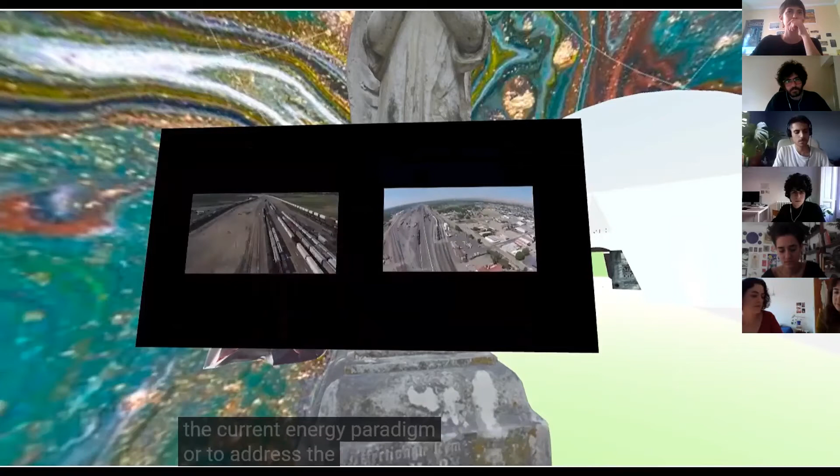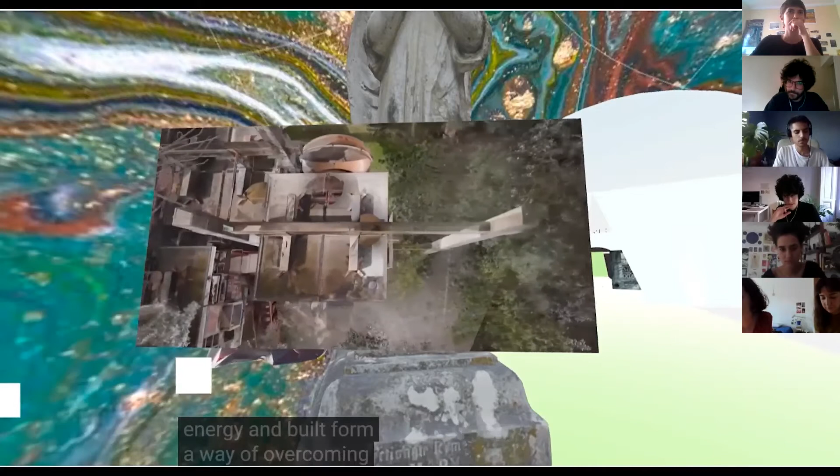These dynamics have given form to new architectural typologies and urban growth patterns that sustain energy-intensive ways of life. As long as its core is constructed by carbon form, the built environment as we know it will be fundamentally unable to supplant the current energy paradigm or address the climate crisis. As a result, we must reconsider the link between architecture and climate by exploring the reciprocity between energy and built form. A way of overcoming this cultural and architectural legacy is by recognizing the spatial expression of carbon energy in order to establish a process of architectural degrowth.

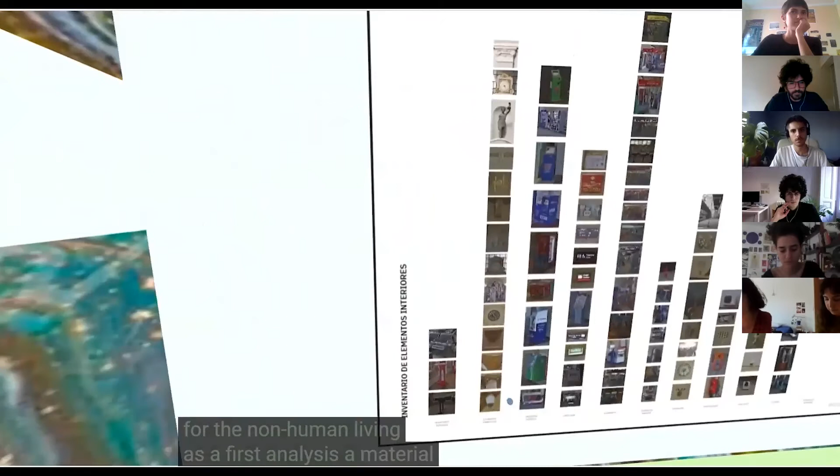We propose a series of interventions, protocols, that induce and accelerate the decay state of the station, understanding ruins as a catalyst space for the non-human living. As a first analysis, a material catalog is developed, locating and analyzing each of the station's construction materials, as well as extrinsic and non-human strategies of degradation. The anticipatory ruination of such spaces comes from an artificial intelligence that unchains a series of protocols of degrowth through data collection of the station's state—an Internet of Plants. Overcoming the nature-technology dichotomy, the tentacular algorithm functions as an autonomous system inside the station, establishing alliances between the human and non-human. A practical experimentation is built as a simulation of one of these network's nodes.

We propose an open-ended collection of 9 protocols following the same structure. They originate from an early required human intervention and develop as autonomous processes in synergy with the AI.

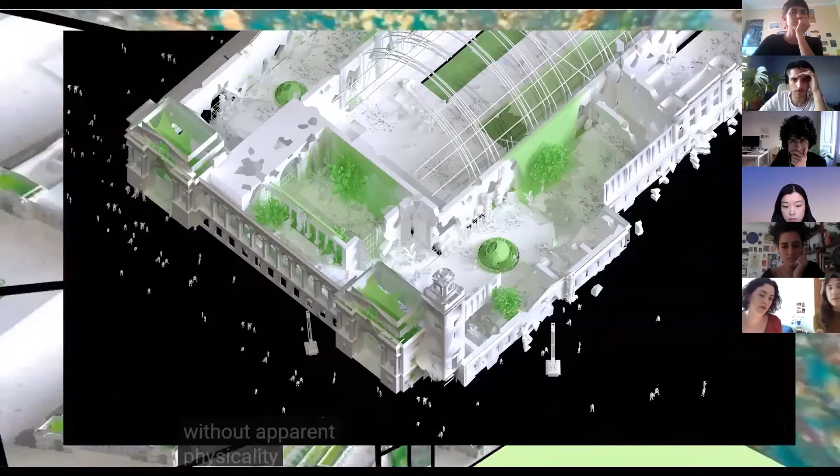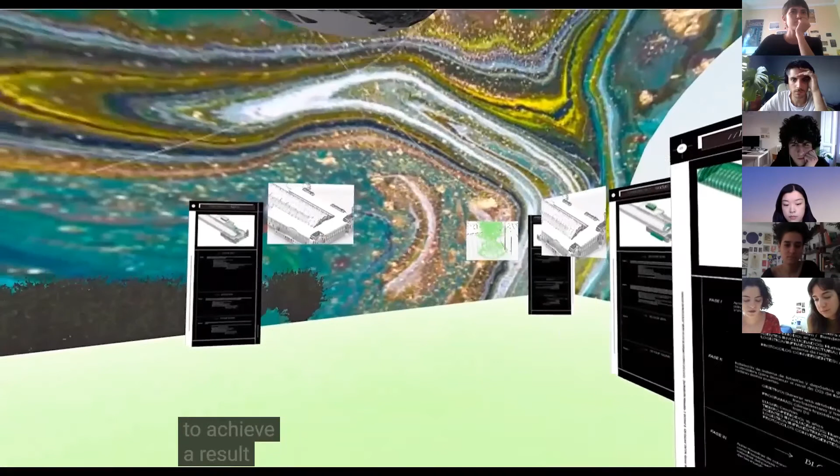We understand protocols as mechanisms without apparent physicality that have the ability to transform space without defining the final result, but only the necessary steps to reach it, enabling, ordering, and prescribing certain actions to achieve a result that, although it has been planned, leaves room for the unforeseen, the contingent, and its conscious manipulation during the process.

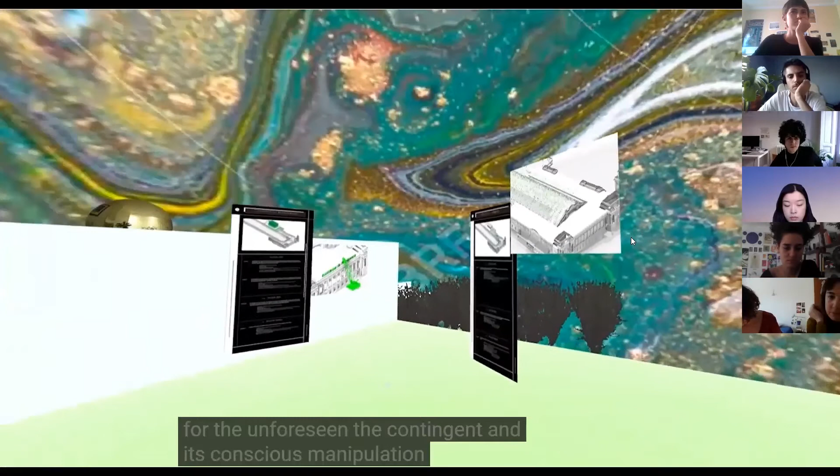The programmed decay of the station is organized along a timeline that encompasses the atmospheres required by each protocol, as well as non-human comfort, therefore redefining human comfort. At the same time, those constructed atmospheres determine an array of possible programs that can take place in the station in different phases.

Ruins are not failed buildings, but ecologies that offer reproductive and creative opportunities, spaces of in-betweenness. As such, it's a transgressive space that is no longer obliged to reproduce the normative system of the meticulously planned out city.

Through the incorporation of animal, plants, insects, microorganisms, and data, the anticipatory ruination, rather than forcing a process of de-anthropization, unchains a picture of degrowth in the consumption of resources.

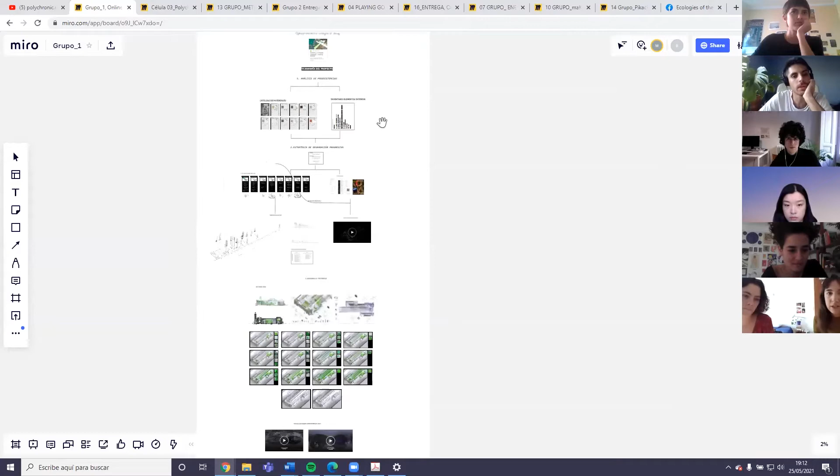In the midst of a... Do you want to show anything from the Miro, or we can just stop sharing screen?

Maybe zoom into the 10 or 12 images that are there that explain the protocols, or the general images, to show an overview of what the evolution could be like by decades.

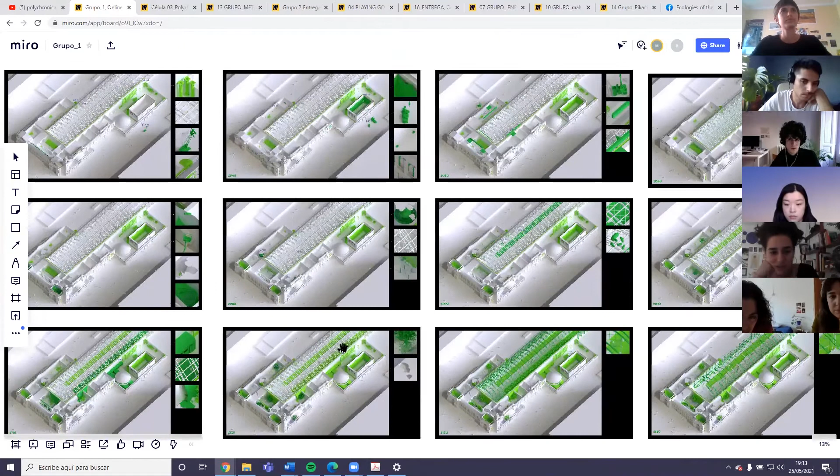These are images that show when these protocols are activated, and zoom into the small parts that take place. And these show the evolution of the protocols by decades.

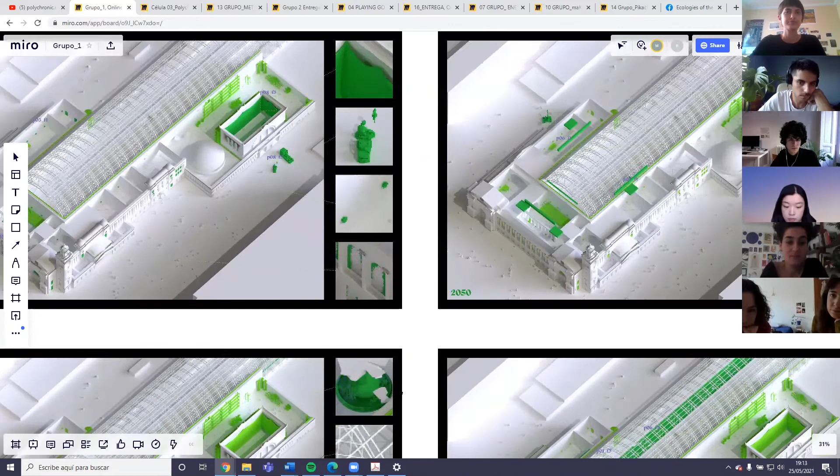It's kind of complex and the project has many layers, so maybe we can wait for the questions of the jury and then answer anything that has been left unclear.

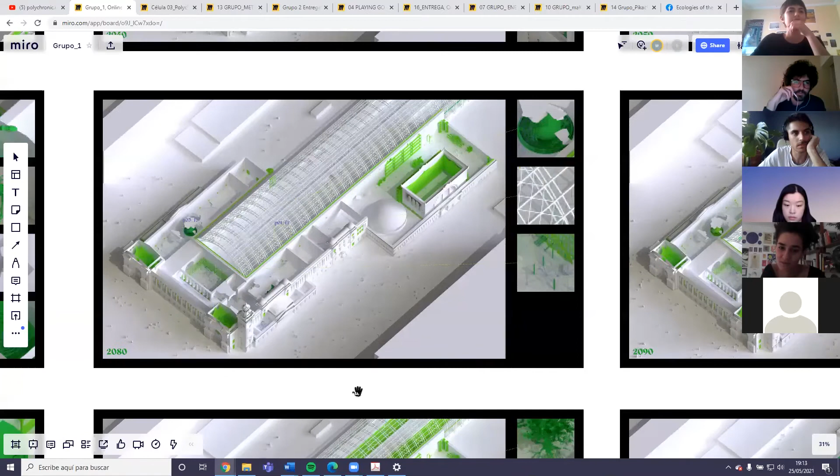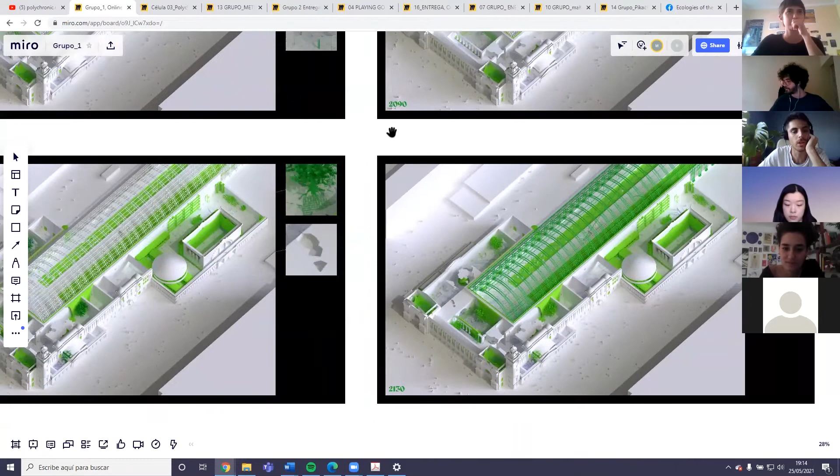I don't know if Regina or Berta, you want to add anything? Also guys, feel free to post the Miro link into the chat, so some of the clients can navigate through it while you explain it, or while they comment, or while we showcase the video. So not only for this group, but also for the next group, remember to post the Miro link. Perfect, thanks. Okay, so do you want to add something, Berta, Reggie, or Marta? No, I think it's okay. Okay.

Your turn, Navi. Hi guys, thank you for the presentation.

It was very nice, and I made some notes, and I have three comments. The first one, maybe I didn't catch the connection between the highlighted topic of the existing architecture, which is driven by the carbon economy, doesn't address the issues related to climate change. So this was the topic, and this was the statement of the initial part of the presentation.

And then you go into your concept, and there isn't a super clear connection on how your proposal is addressing these issues. In the first part you describe the different kinds of protocols, but it's something that happens with a single building, and you don't know what happens around this building. So this system seems designated to deconstruct this building, but where do people live and how does society work in this case?

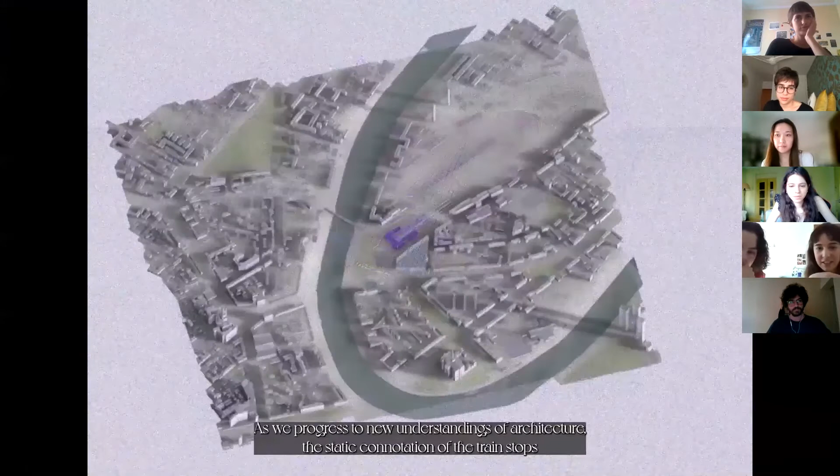In the midst of a search for a carbon-free form, all the preconceived systems are to be re-evaluated. Our concern today is the one regarding transport. As we progress to new understandings of architecture, the static connotation of the train stop is to be replaced with redefinitions in regards to resources, movements in space, time schedules, and density correlations. Station is no more stationary.

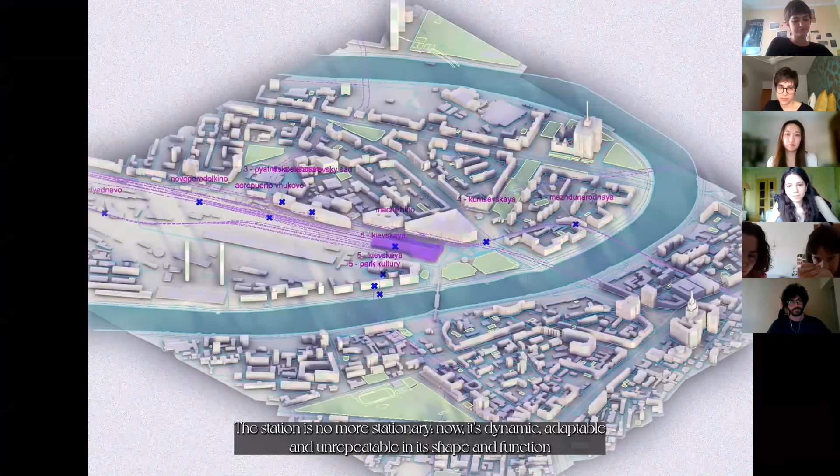It is dynamic, adaptable, and unrepeatable in its shape and function, for it is in constant evolution and form finding. The spatial behaviors of the inhabitants draw multiple possibilities, and these are all taken in by the architecture.

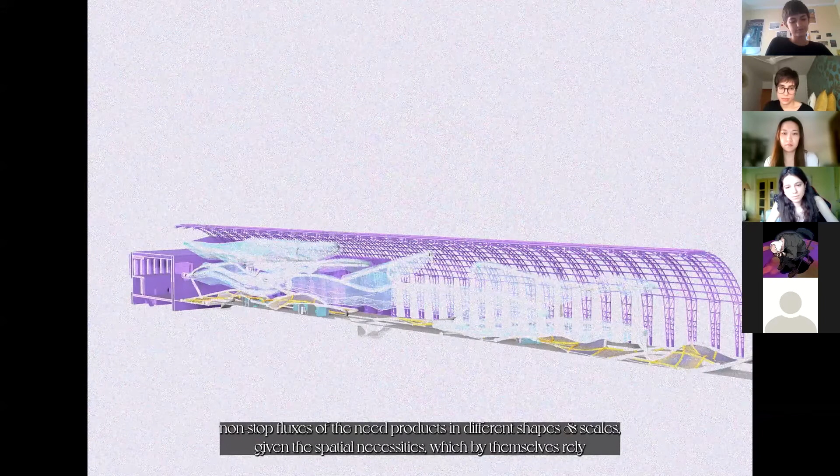The structural support of the polychromic involves cylindrical extensions, loaded with energy, thus providing non-stop fluxes of the needed products in different shapes and scales, given the spatial necessities, which by themselves rely on the individual's movements.

The secondary structural order carries directly the weight of the walkable surfaces, and it is a more flexible type, since it is meant to change positions and create specific environments for the superior layers.

The last order participates in the absorption of carbon dioxide by carrying water inside. These tubes will be covered by a PEI polymer that absorbs these molecules in the air within a low range of ambient temperatures. When these rise, the carbon dioxide is released to the water flow to the membrane, to the filter tanks, provided with Escherichia coli and Pseudomonas, which process the solution into hydrogen for the train's fuel.

Elevated from the floor and layered on top of the flexible support, the membranes create different atmospheres by adapting to the lower framework, but also inherently with their play of translucency and opaqueness, as well as the temperature's fluctuation. The primary structure is braced with tensils and pulleys, while the secondary one involves elastic stripes.

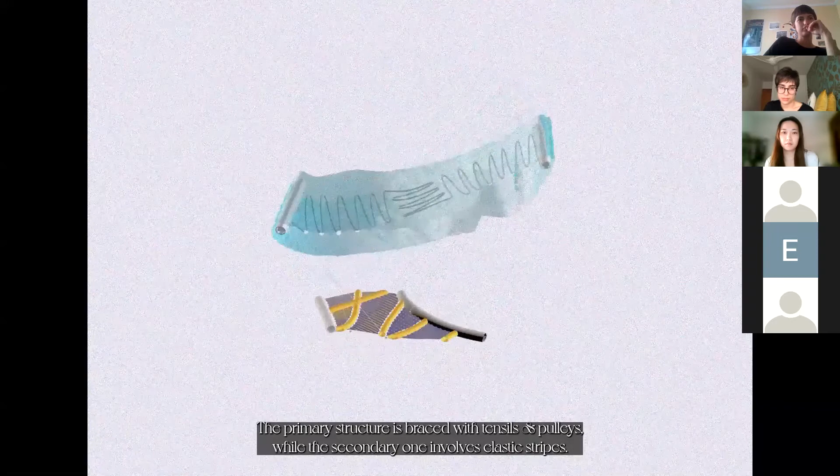It is the merging of all those systems working simultaneously that allows achieving a more complex and richer spatiality, where the architecture is able to respond and adapt to its real situation.

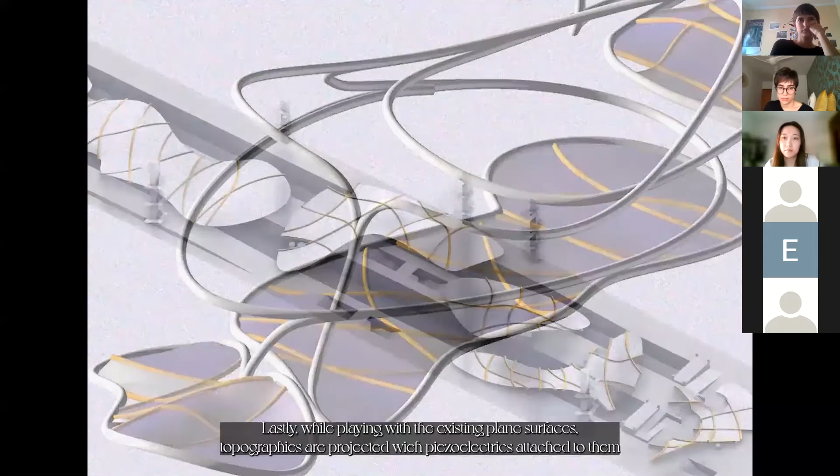Lastly, while playing with the existing plane surfaces, topographies are projected with piezoelectrics attached to them. These are embedded onto the surfaces and accumulate heat with pressure. Within the mere act of depressing the horizontal skin of the building, energy is produced in order to push the whole system into

activation and create suitable atmospheres both in a tangible and sensible way. This whole sensible system is served by different technical locations within the lower section of the topographies.

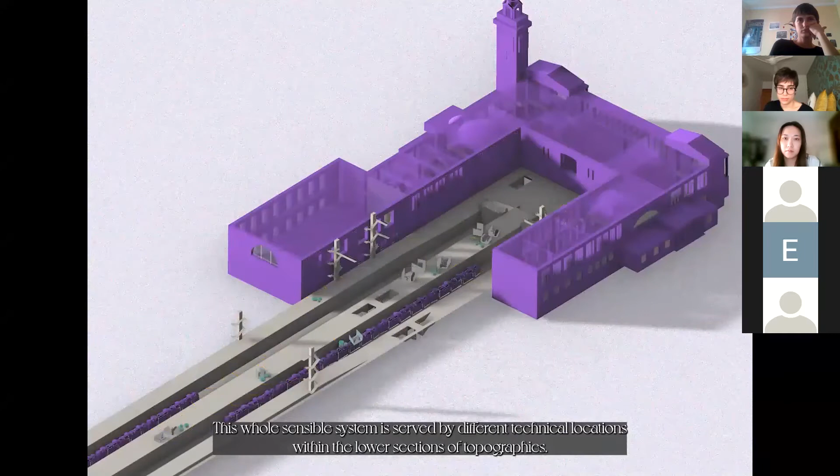The automatic servers are also linked to the main tube structure in order to distribute supplies along the station. A number of possibilities of these spatial behaviors is set to provide a living organism that moves and shapes itself into desired and necessary forms based on the activities.

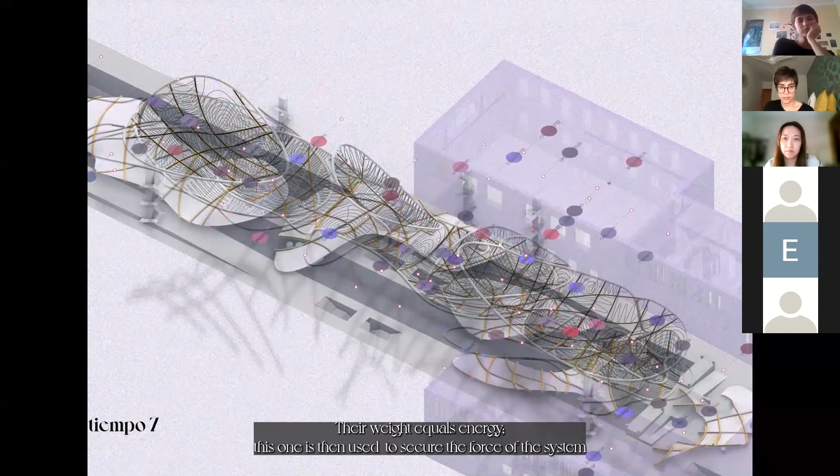Their weight equals energy, and this is then used to secure the force of the system through the electrical capacity of the topographies. After all, resources, temperature, and humidity should be used as spaces by themselves, spaces that harvest energy due to the densities and movements.

Overcoming carbon form not only means changing the way we build and live, but also our approach to a static architecture conceived to last unalterable in a future that it is not.

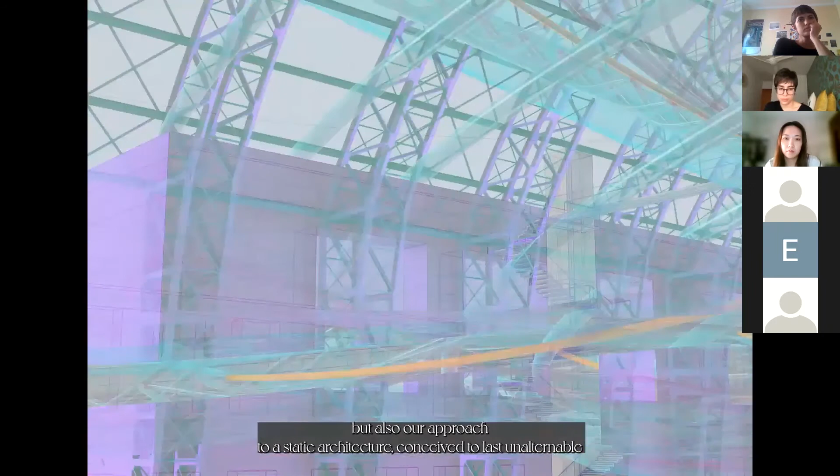Okay, Carlos, do you want to show anything from the Miro? Yeah, also, remember to share the link in the chat, please. Yes, please. Yeah, Marcos, thank you very much. We could see the plans and the sections, which are, yeah, this is the plan, and yeah.

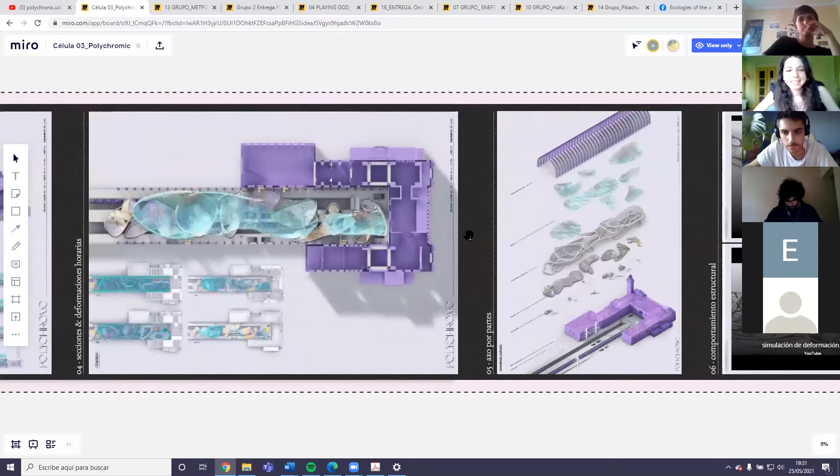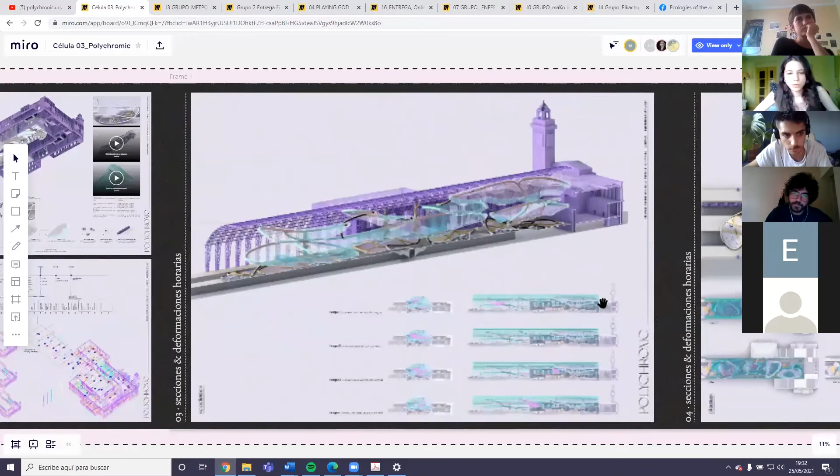Okay, so the last time we presented, we focused on exploring the atmospheres that we wanted to represent in our spaces, which had to do with constant movements and also harvesting energy, creating a tight relationship between the user and the energy itself, or the spaces that would create this energy. This time we tried to find the physical extent of those atmospheres and understand how this structure can really represent the whole gradient atmosphere we wanted to generate, and how these deformations—you can maybe see them, they're a little tiny, but they're on the section part, and you could see them in the video as well—explore this relationship between the constant movement of both trains and users, and also architecture.

Thank you very much. Okay, so you're done presenting, right? Yeah. Okay.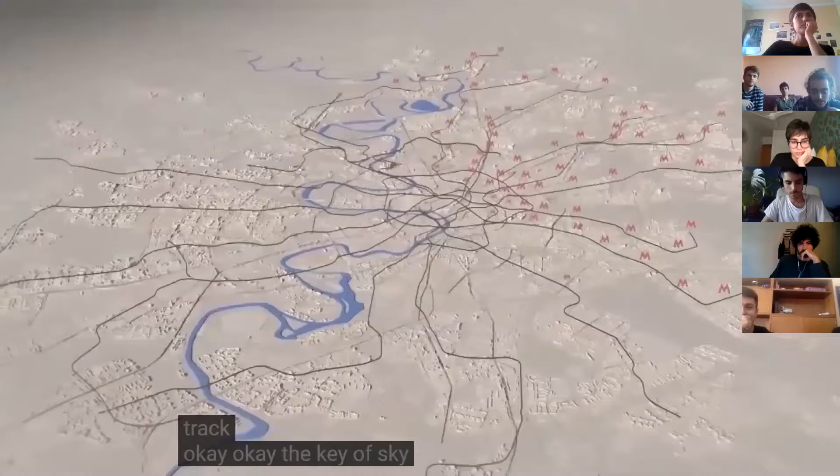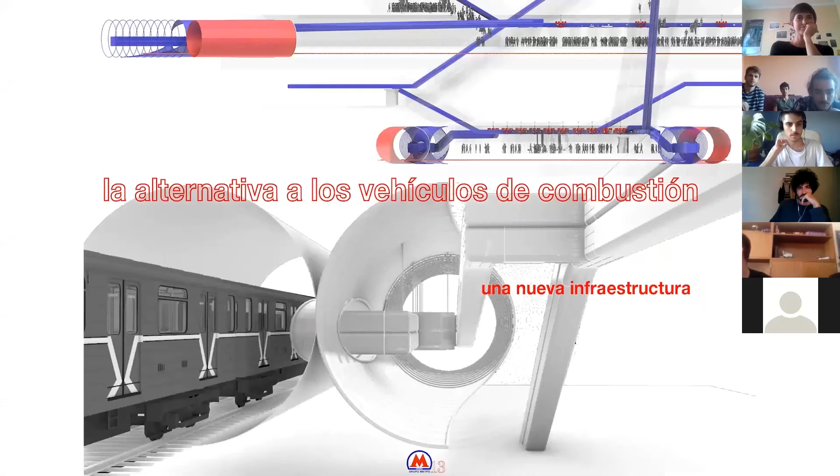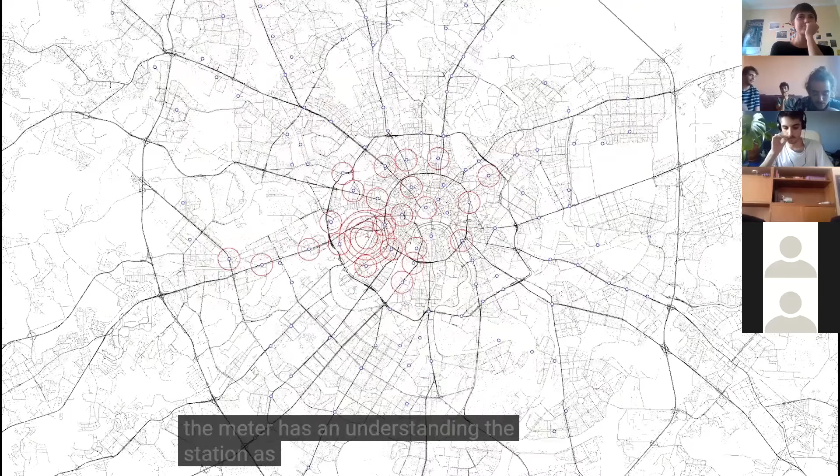The Kiyevskaya station stands up with a bunch of opportunities that inevitably lead us to different interventions. Taking advantage of this dynamic condition the metro has, and understanding the station as the vertical connection with the surface, the first intervention appears: a proposal that plans an alternative to the actual delivery system with combustion-powered vehicles. It's a system that works with the flow of people.

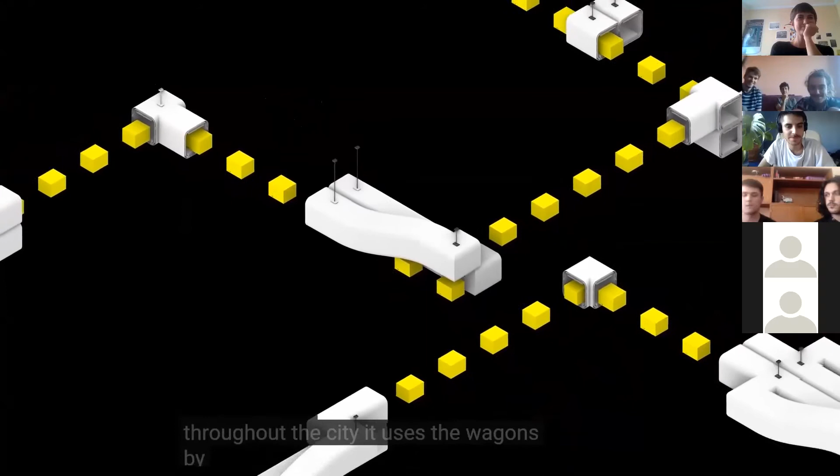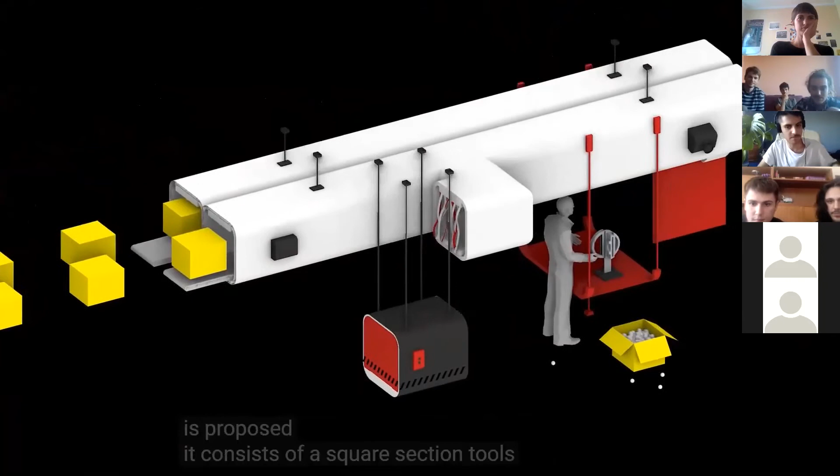And takes advantage of the train routes throughout the city. It uses the wagons by transforming some of them for the transport of packages. An infrastructure is proposed, consisting of square-section tubes sized for a standard delivery package. It transports the packages from the wagons to the surface, and vice versa.

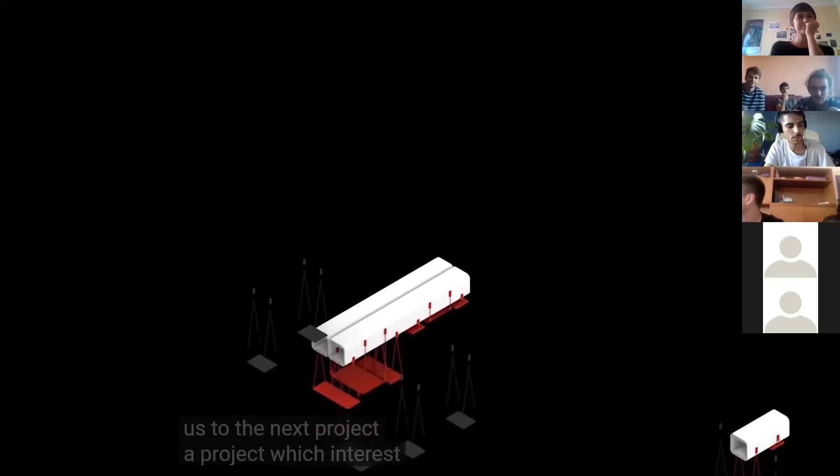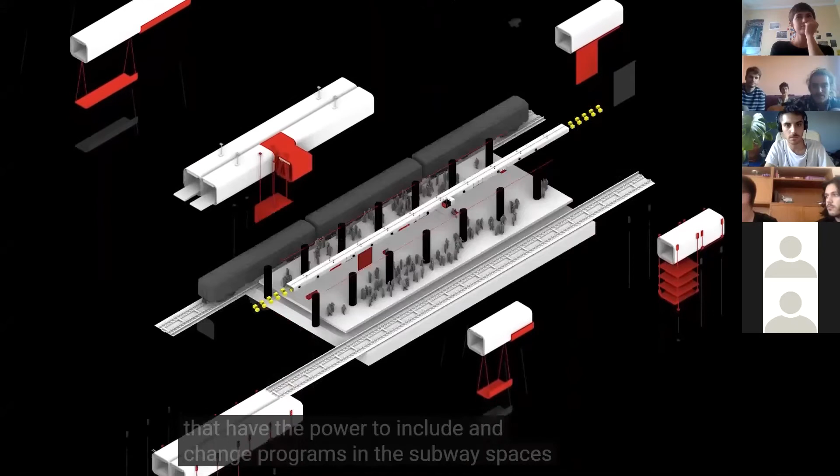This tubular infrastructure leads us to the next project, which is interested in making this place of passage habitable. It uses the delivery tubes for installing a series of gadgets that have the power to include and change programs in the subway spaces. It finds opportunity based on the times of the station and variations in density of people.

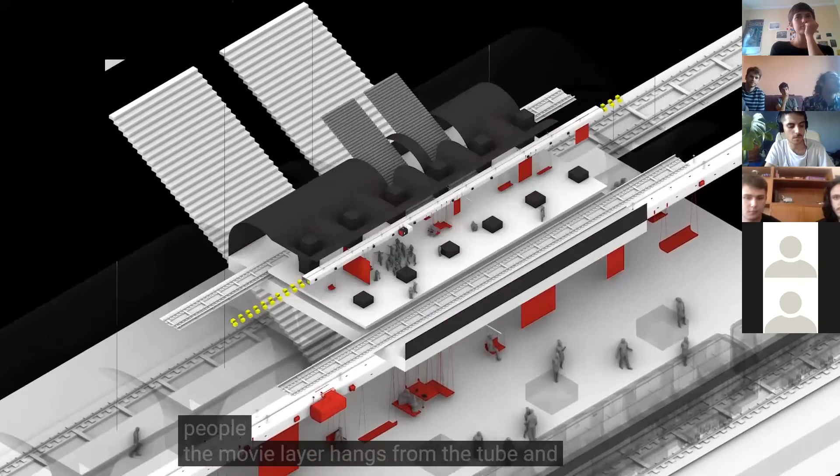The furniture hangs from the tube and creates a variety of temporal programs—a market, a coffee shop, and an art gallery, for example, can happen at different hours in a day. Also worth noting are the video mapping interventions that complement the exhibition program and have the power to change the visual condition of the place. It aims to create a different station every day.

On another side, there's an imminent decay of the existing museum next to the station. Its actual use is to gather an exhibition for the future new line of the Moscow metro. This is key for the development of the next project: transforming this museum into a workshop that can extract wagons from the lines and change their usage, making them run again as delivery trains. Also, in the new workshop, trains can be repaired or old trains discarded.

This last project proposes to recycle these old trains into a wagon cemetery outside. The wagons build a multi-program tower.

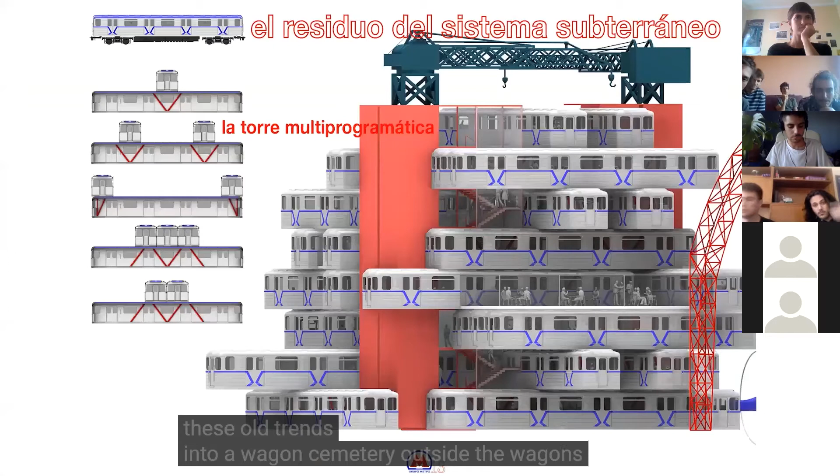A place to be and not for consuming, it dialogues with intervention outside of the station. The wagons are transformed to attend to structural and habitability questions, transforming into structural beings that can be piled up, maintaining the existing elements such as doors and windows.

The tower organizes around 2 communication blocks that have the function to include the main installations of the building. Like this, it appears a tower made up of underground waste that grows against the enormous shopping center at the other side of the street.

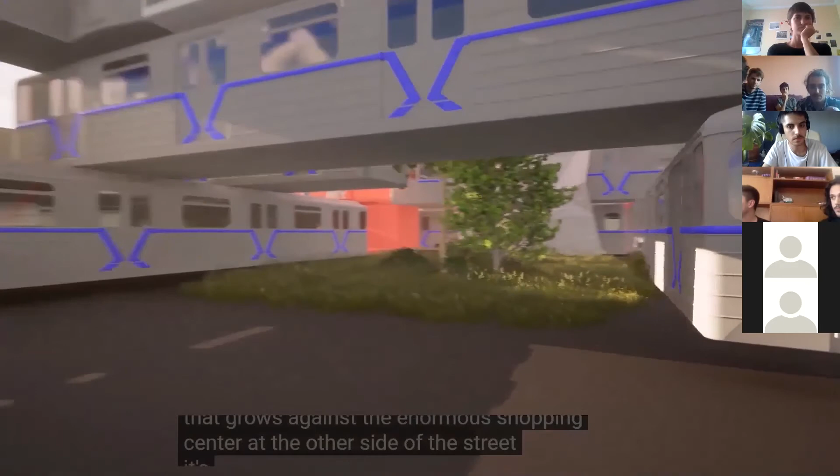It's not only a constructive solution, it proposes a new space that has a symbolic transforming condition in a recycling level in a post-carbon era. It is pretended to make a transformation of the station in different scales, taking into account questions like mobility, delivery, coexistence and recycling.

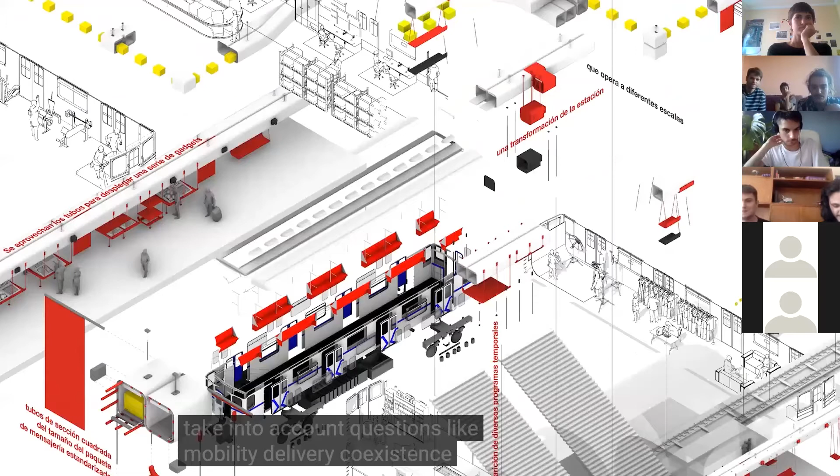These interventions work on the Kievskaya station, but they are examples of a system that could reach the whole metro network, working in different stations throughout the city.

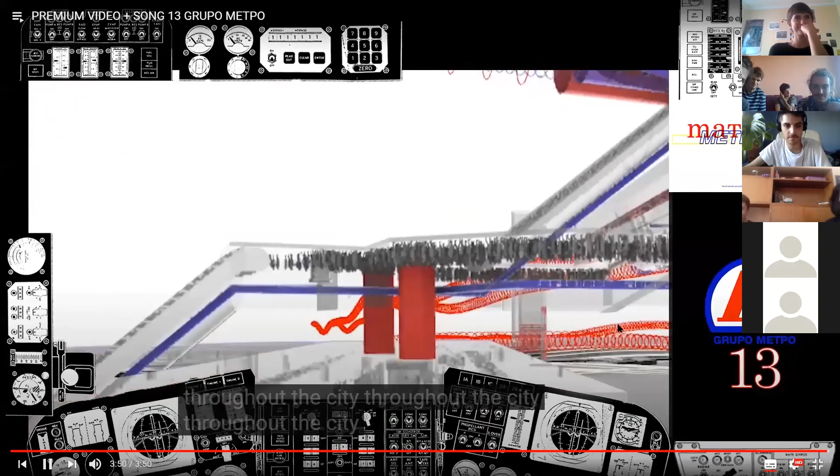Okay, guys, do you want to show anything from the Miro? And maybe the views, there are some views, some key views of the places. Which ones? These last ones? Yeah, but yeah, I mean... okay.

I don't know if you want to comment anything, David or Javi. Maybe you can jump into the comments of the client, and then you guys may answer after that if you find that more useful.

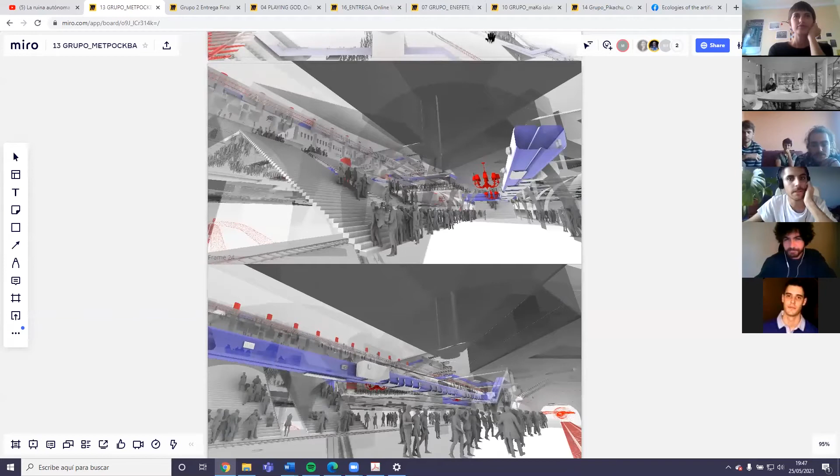I think I only could say that I really enjoyed this presentation. It's a very nice way to present things, with music and the video, in a very dynamic way. I only think that I missed a bit—this project for me, it looks like the most feasible because it's not like looking to changing paradigm, this kind of feasible post-carbon future.

We still have the same behavior. We like to consume things, we like to deliver things and ride trains, but this is just like post-carbon trains. And the trains are the same old trains, but they are post-carbon, and yes, that's it.

I think I would love to present like this once to the client, where it could be a very formal meeting, and then I just check the music, and then we just start discussing the project. Though I think it was fun, it was definitely very dynamic and not boring.

Shall we answer, or is it okay? No, I think that we thought a lot about this, about like how with the post-carbon era como like frame—

Obviously it is difficult to propose something that changes or not the paradigm, but I think the aim was to build in positive an alternative, understanding that we want to live in cities without combustion vehicles, and we have to reduce all that transit, having the transport network that the metro is, which is great. How can we take advantage of that? I think that was the aim.

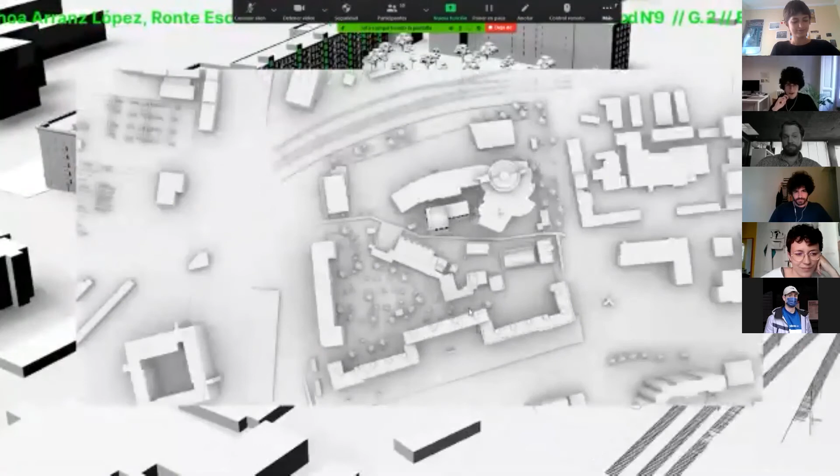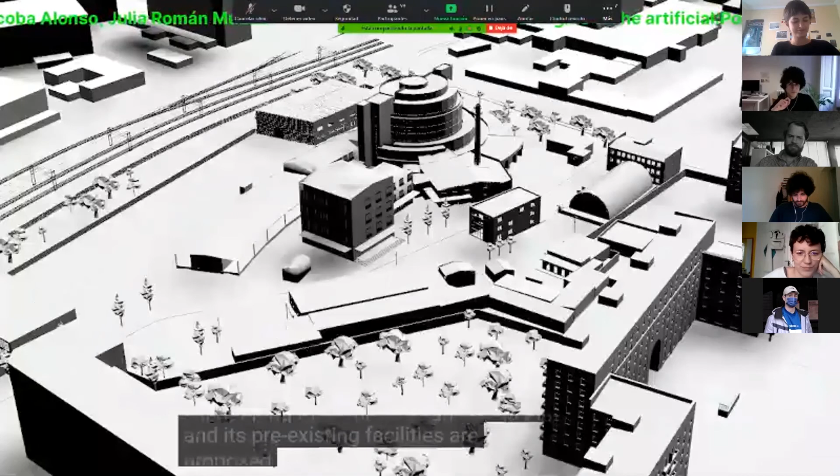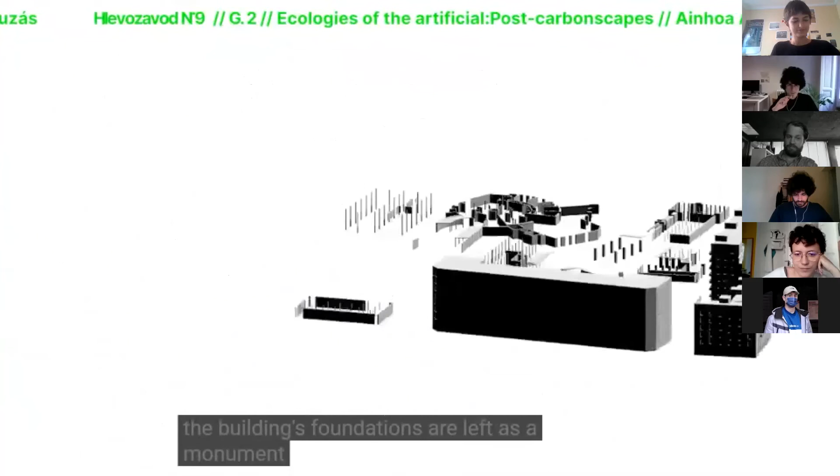The project proposes the integration of a public green space in Moscow's metropolitan area in the form of an ecological cemetery. For the design of this large space, overlapping systems throughout the plot and its pre-existing facilities are proposed as a way of attacking Anthropocene materiality. The project begins with the ruins of late urban capitalism. The building's foundations are left as a monument to its own death, but also to project new space.

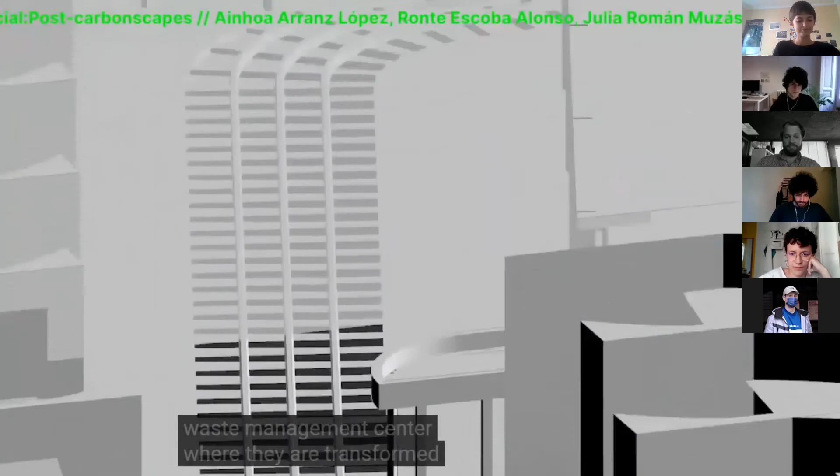Simultaneously, the works begin to coexist with the burials. A new train line branch comes into a loading and unloading area. In this area, the debris from other architectures are disposed of. After that, they are redirected to the Waste Management Center, where they are transformed into gabions. The left debris is used to create a topography of mounds that house the tombs. The main elements are pavements, gabions, and funeral bulbs, which can form a constructive system.

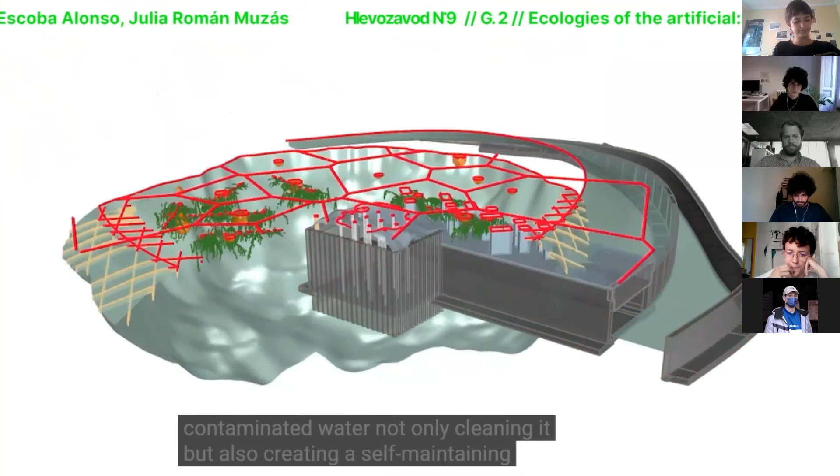A system of ditches and pipelines will be installed, solving the problem of contaminated water, not only cleaning it, but also creating a self-maintaining green space. This local green space will thus contribute to improving the problem of air pollution in the city. As today's cities are paved, soils are not permeable and the phenomenon of heat island is generated.

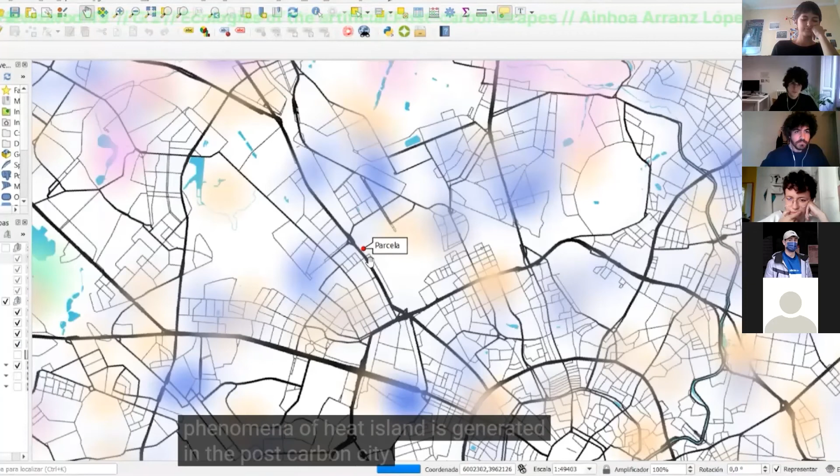In the post-carbon city, soils must regain their role in the hydrological cycle, which has been interrupted with serious consequences. Droughts, flooding, and water pollution are directly associated with the properties of geological soil. Recovering its properties involves regenerating an erodible, evolutionary, and adaptive soil. This means adapting to one of the main effects of the Anthropocene era and reversing it.

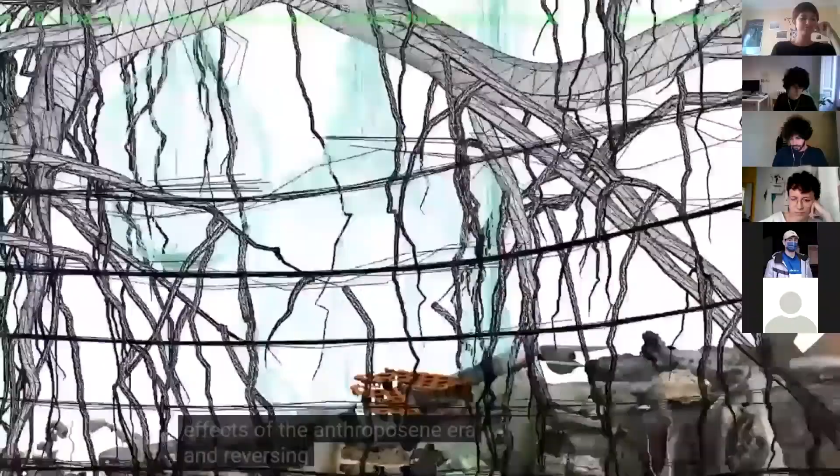We will create a topography with the debris of the building's facades, covering them with an erodible temporal pavement, which will subsequently give way to the regenerative, fertile soil. The tree roots will support the granulometry of the substrate, preventing landslides.

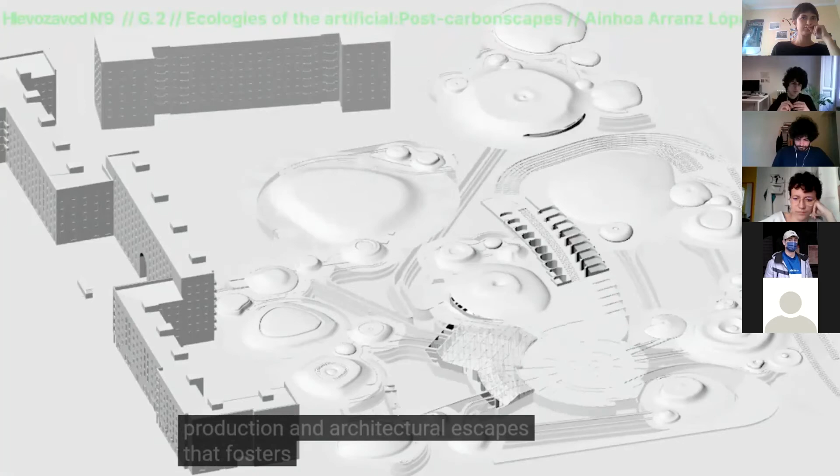A re-evaluation of the pre-existences might lead to a model that counters the overly controlled, labor-centered, exploitative and expired architecture. The proposal helps develop new narratives about death, production and architectural scapes that fosters community experimentation, new role models and post-carbonscapes constellations.

Okay, girls, you asked me to show this drawing. Can you hear me? Marcos, if you can put the other panel, the second one.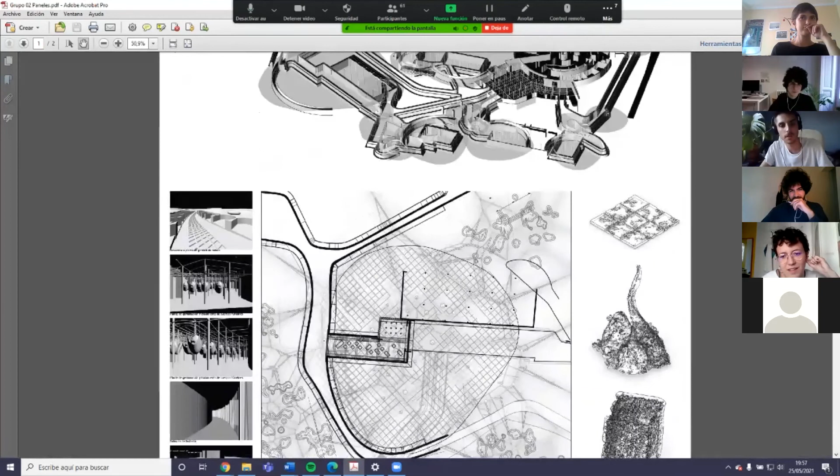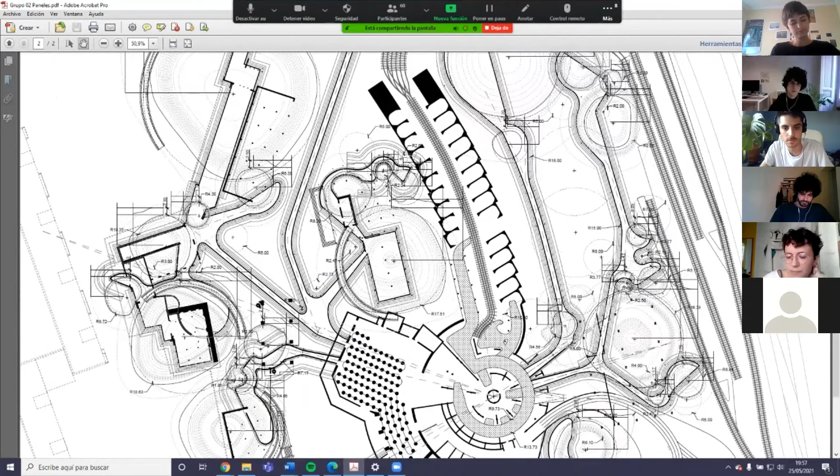Well, here in this first picture that Marcos showed, you can see an example of organization of one of the funeral mounds with a burial chamber, and in this global plan, you can see how we use the pre-existences and the foundations of the old factory, and the mounds and the waste management center, that is this central and circular structure.

We would like to hear your comments. Thank you very much.

Thank you for the presentation. I have a couple of comments, maybe ideas regarding this project. I have a sense that in the nutshell, the concept of this project is not about the burial and other things stated there, but mostly it seems like a project for restoration, a way to mitigate different kinds of issues related to climate change. Since we're talking about how to mitigate climate change and restore soils, all these proposals look a bit too complex. If you want to absorb some CO2, you better restore some wetland in the Moscow Oblast or something like this.

Here we see a very complex and technological process, and it's not very clear what is driving it. The second thing, maybe it could be part of the topic if you have an opportunity to work on this further: you could try to think about the socialist heritage of this site, because there was a topic about late urban capitalism, and this site is dramatically opposite, because this is a constructivist building, architecture for the socialist future, and now you haven't got this sense at all.

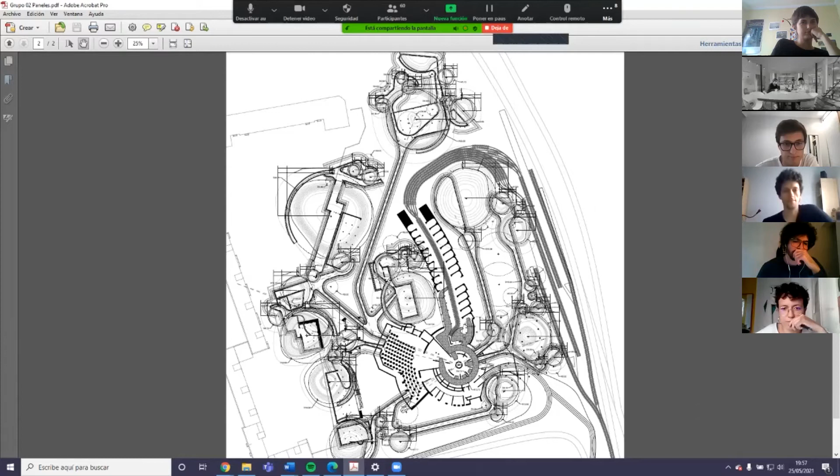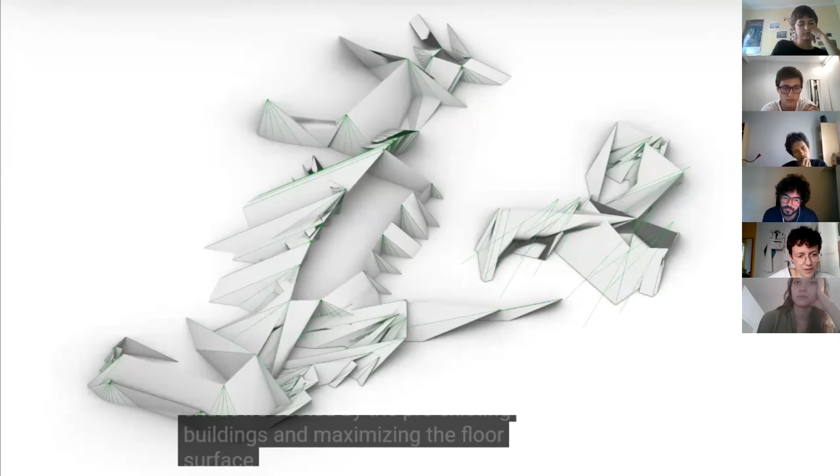We first contacted the site by understanding its weather conditions and solar analyses. We developed studies about buildings' heat loss and the shadow casting inside the plot limits. These analyses allowed us to develop an improved floor plan that minimizes shadows cast by the pre-existing buildings and maximizes the floor surface with direct sunlight. Thanks to these modifications, the floor area increased by 5% with no building materials needed.

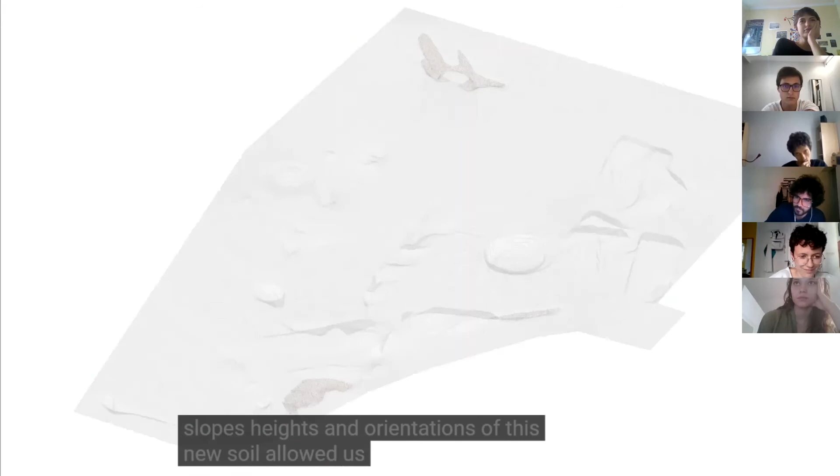The slopes, heights, and orientations of this new soil allowed us to locate crops and aromatic plants in the better locations inside of Khlebozavod. However, given the harsh winter conditions of Moscow and the latest improvements in farming techniques, we developed an infrastructure of hydroponic, aquaponic, and aeroponic vertical farms and research labs for further developing these innovative techniques.

The towers act like huge laboratories of food production and research. In order to feed the whole project with water and the geothermal plant for the conditioning of different programs, we developed a prototype that collects rainwater and introduces it into the water circuit of these organisms.

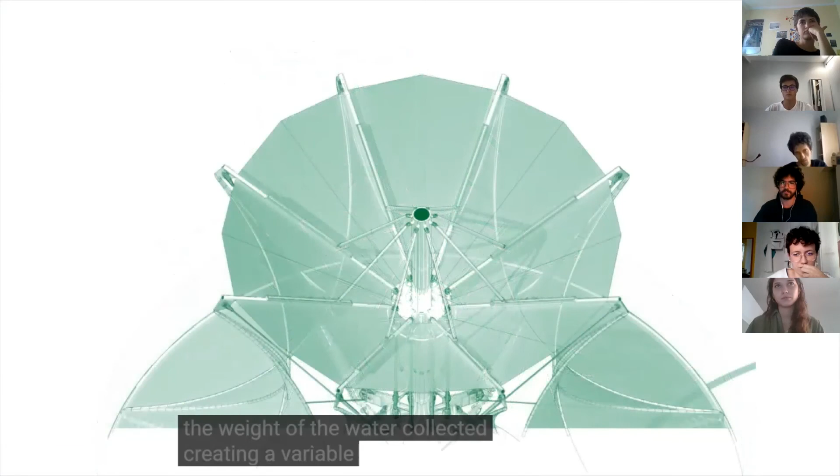These umbrellas vary their form due to the weight of the water collected, creating a variable space beneath them where thermal baths and bars for the visitors are located. Eleven of these artifacts are located around the baths and connected by a flexible light enclosure that increases or decreases its height according to the pluviometric variations.

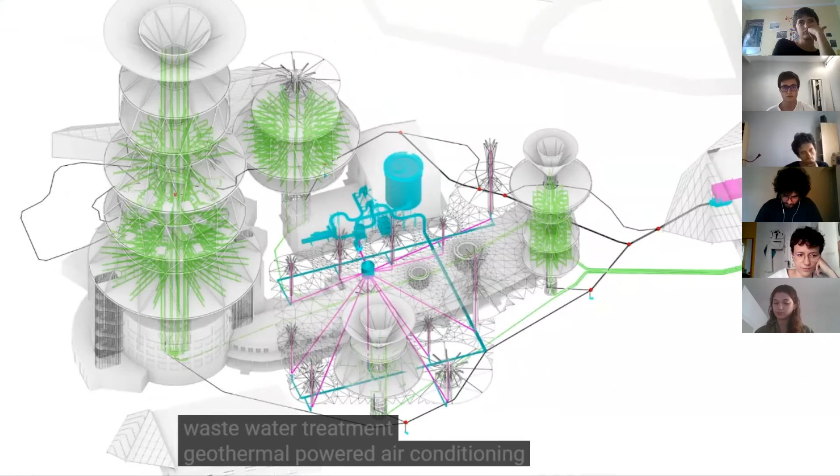Beneath the ground and connecting all the programs located at the plot, we designed a system of water collection, wastewater treatment, geothermal-powered air conditioning, and clean water supply. These complex networks that we developed supply leisure-related spaces as well as within the plot.

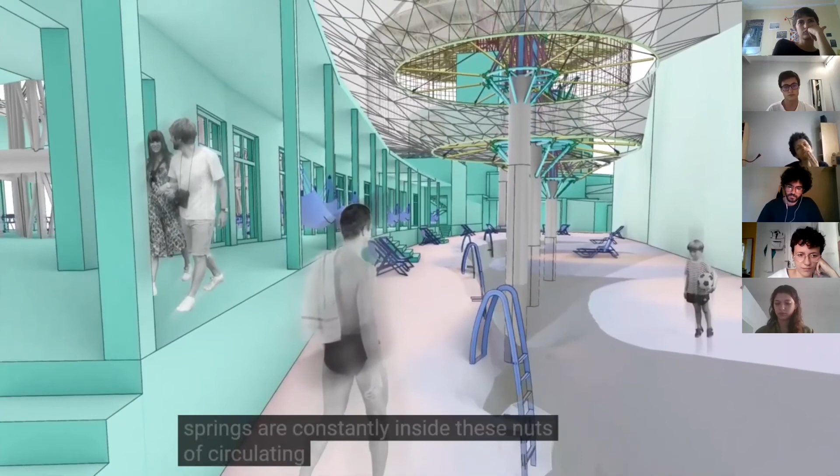The pools and the baths of the hot springs are constantly inside these nets of circulating water, also supplying the aquaponic farms located up in the towers. Later on, the crops collected can be delivered to the city by a logistics center that connects the plot to Moscow by the railway.

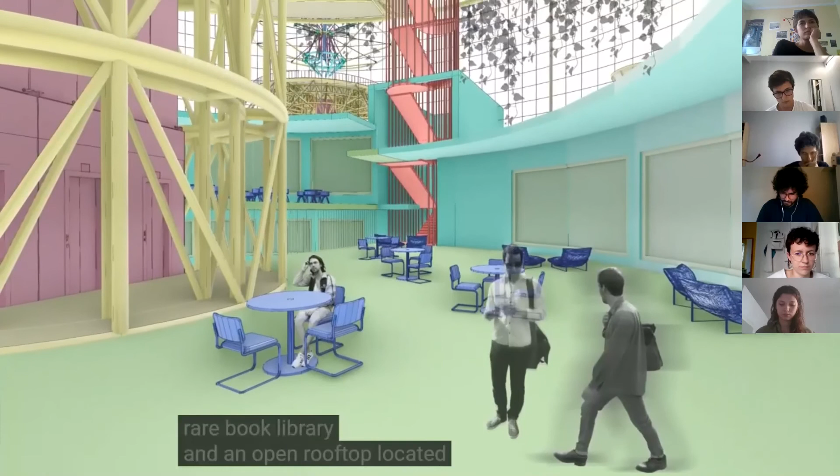Apart from the mentioned eco-farming and the water treatment facilities, the project contains programs for the possible human visitors, with a variety of facilities such as a rare book library and an open rooftop located in the pre-existing main building, or a hotel.

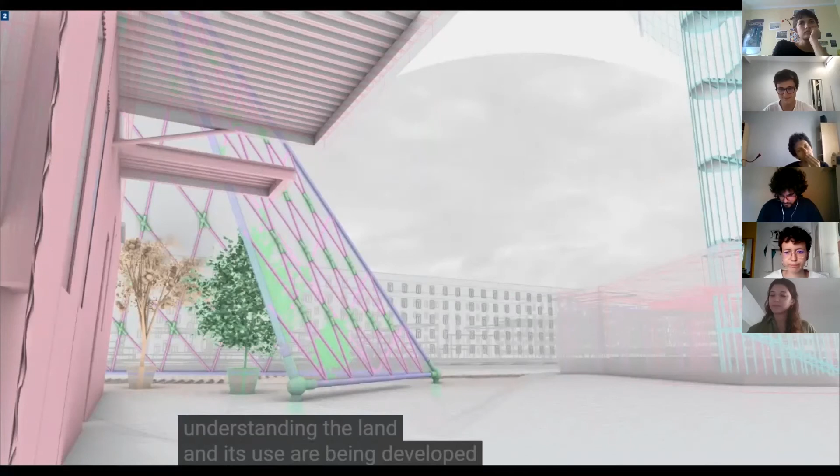Rather than an architectural project, Playing God is conceived as a functioning organism, where new ways of understanding the land and its use are being developed. Here, the land, the rainwater, as well as heat gains and losses of the pre-existing structure all add value and functional details to the project as a whole.

Okay, guys, you asked me to show this drawing, right? Yes, okay. Oh, I can see it.

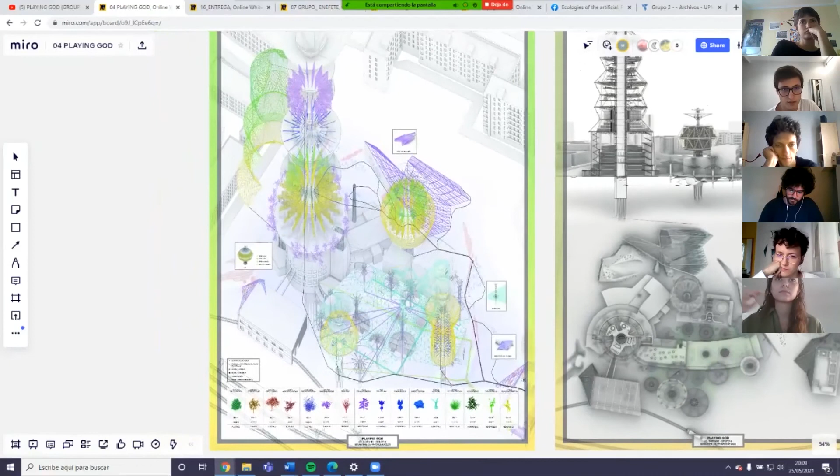Okay, yes, in this axonometric it's actually explained, if you have the link, the location of the crops we talked about, depending on the topography, and also inside the towers, for the aquaponics and hydroponics. And also the systems of the water that we collect and then recirculate into the circuit, not missing any water.

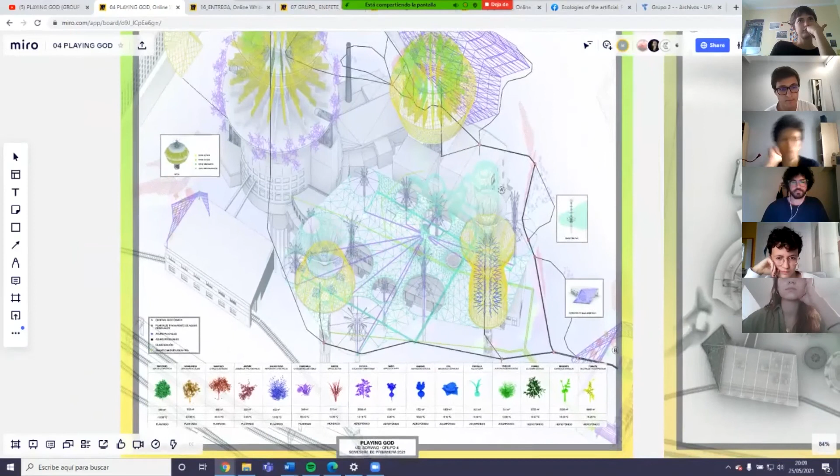But yes, that's it. Okay, thank you. Thank you.

Well, first of all, it's quite clear, the concept and the idea. The only thing is that you begin with the sequence of the kind of conditions that drive the earthworks, as I understand, right? You're kind of creating this artificial landscape, and then you bring us through the sequence, implying that you're going to explain step by step what is happening, right?

And then all of a sudden you show the tower that was not explained at all, and if I didn't see this project before, I'm like, where does that tower come from? It seemed like we were taking steps and I missed some, and then you explain the tower through the prototype. So I think you need to explain that footage with the tower before you show any image of the tower as the building.

And then again, a comment similar to one of the previous ones with the train station — you have this missing link. In general, a lot of the diagrams you're showing are different views of your 3D model, or different sections you're cutting in Rhino and moving back and forth, or rotating. The diagrams you're missing are the ones where you export a make-2D of your model and show us how the water travels through the structure, where it's distributed, what it's used for, things like this.